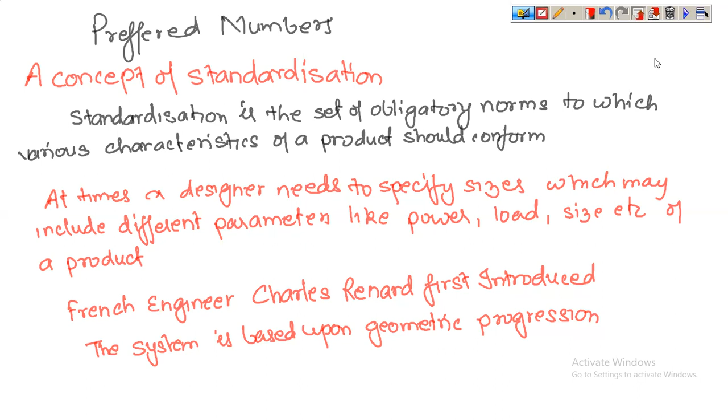So, if you look at the series of preferred numbers, the preferred numbers are of two types. One is basic and the other one is derived. A basic series means those series which are well designated, well in use, well in practice, and you only need to use them or specify them at the time of their usage.

So if we see R5 series, R5 series means it is the fifth root of 10. That is equal to 1.58. R10 is 10th root of 10, 1.26. R20 is 20th root of 10. So this is 1.12. R40 is 40th root of 10, 1.06. And R80 is 80th root of 10.

That is 1.03. Now, any series of preferred numbers is designated by a multiplying factor, that is this phi. This phi is used to clarify or specify the preferred number or the basic series that is being used or practiced. So with the help of one example, we will be seeing how this basic series and how these derived series are actually used in practice.

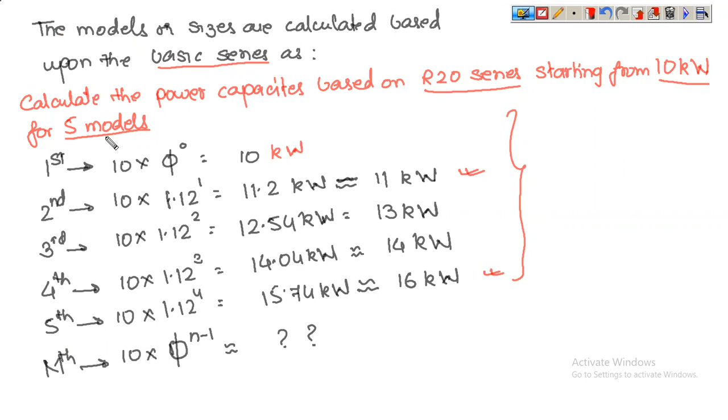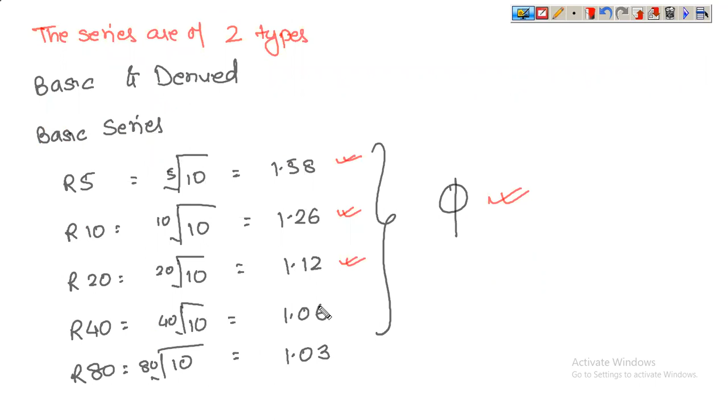Or you can say that this is your derived series. Now these derived series are not part of the standard series which have been mentioned here. These are standard series, and when you are not using the standard series, you can use this derived power series to specify your problem.

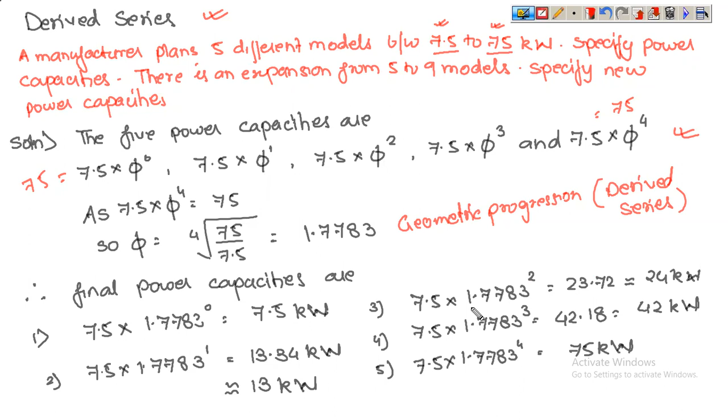So φ, if you calculate it, this fourth root comes out to be 1.7783. So the final power capacities shall be 7.5 into this geometric progression factor or derived series factor to the power 0. So this is 7.5 kilowatt. 7.5 into φ to the power 1. This is 13.34, which is equal to 13 kilowatt. For the next one, you have to multiply 13.34 by this 1.7783, not 13.

Okay, so the previous value, or you can straight away put it in this way, 7.5 into φ squared is equal to 23.72. This gets equated to 24 kilowatt. Similarly, the fourth model is 7.5 into φ to the power 3. This is 42 kilowatt, and 7.5 into φ to the power 4 is 75 kilowatt. So these are the 5 model capacities based upon the derived series, and the value of the series has been calculated in this. So in the problems of derived series, the first and the last model sizes will be known to you, and you will also know how many models have been planned.

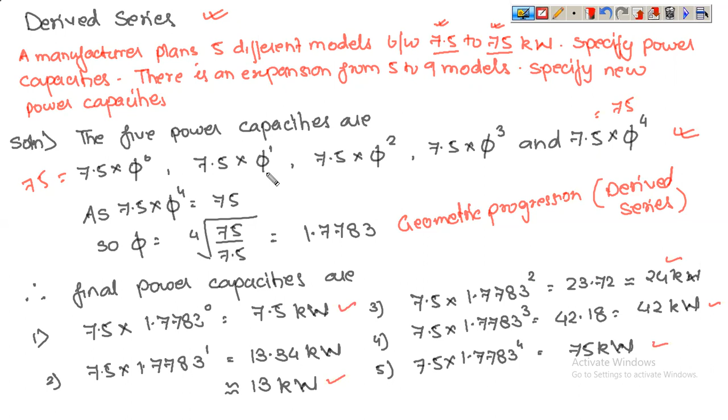Now coming to the second part of the problem, it says that there is an expansion from 5 to 9 models. So what was 5 here now becomes 9. That means 9 models have to be incorporated starting from 7.5 to 75 kilowatt. So look at those 9 models. This is altogether a new problem. So φ becomes equal to the 8th root of 75 by 7.5. Because for 5 model capacity, this was the 4th root, so for 9 model capacity, this is the 8th root.

So this is 1.3335. So the new power capacities will now be 7.5 into φ to the power 0, φ to the power 1, φ to the power 2. Similarly, if you go on calculating, you will have these 1, 2, 3, 4, 5, 6, 7, 8, 9 models, wherein the first model will be of capacity 7.5 kilowatt and the last model is of 75 kilowatt. And this is how derived series are used in practice.

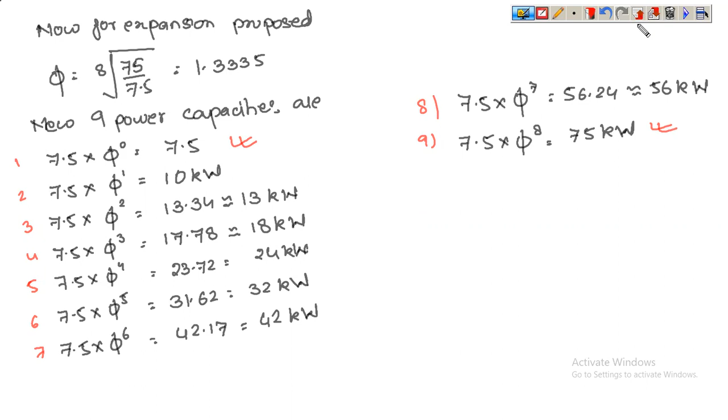Now there are 2 considerations in design. There is one aesthetic consideration and the other one is called the ergonomic consideration. So aesthetic consideration means the beautification of the product, how aesthetically you are representing the product. If you take the case of a car, aesthetic considerations means how the tail lines have been designed, how the streamlined structure of the car has been maintained, how the doors are looking, what are the interiors, what are the colors of the interiors. They add to the aesthetic value of the product, and they do not have any great technicalities associated with them. They are mostly related to beautification of the products, how much they are pleasing to your eyes.

Now next comes ergonomic considerations. Ergonomic considerations are man-machine relationships: how the components or equipment have been placed in the system, how a man is able to use it. As we know, in India, people mostly work with the right hand. So the right hand has control of, for example, the side indicators, whereas the left hand is restricted to using wiper options. The answer is very simple: the side indicator will be used more frequently as compared to the wiper.

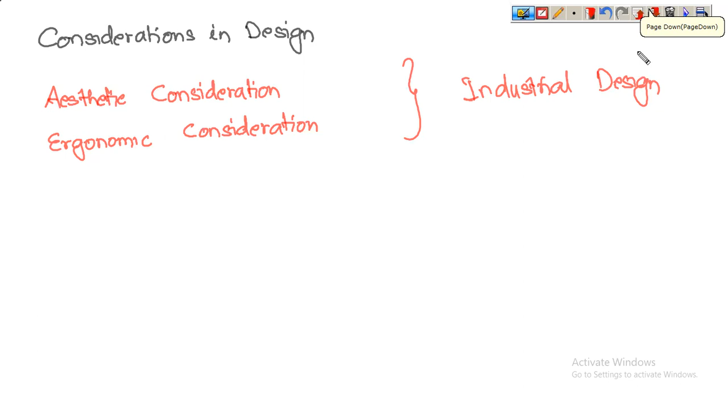Now, talking about concurrent engineering: previously, the manner in which the design process would continue was that the designer would specify the dimensions of the product. He would send it to the production department. The production department would prepare a prototype, then test it, and subsequently manufacture the complete product and send it to the sales and marketing department.

The sales and marketing department, after launching it in the market, would come out with feedback on what the possibilities are or where the product is getting a negative response, and once again the design process had to be conducted. Now, concurrent engineering is a method of designing where people from different departments sit together across a table and design the product. This helps us in having input from various quarters, and these inputs can be effectively utilized during the design phase itself, leaving very little scope for rework.

So concurrent engineering is basically a new concept in design, wherein people from different profiles of different departments, like for example, the sales and marketing personnel, are supposed to evaluate what the customer wants. So depending upon the customer requirement, he also gives his feedback during the design. When the material is being selected, the manufacturing and testing department can also give their opinions about the manufacturability or machinability of the selected material. So the material can be altered at this stage. Depending upon customer requirement, the basic design features can also be altered.

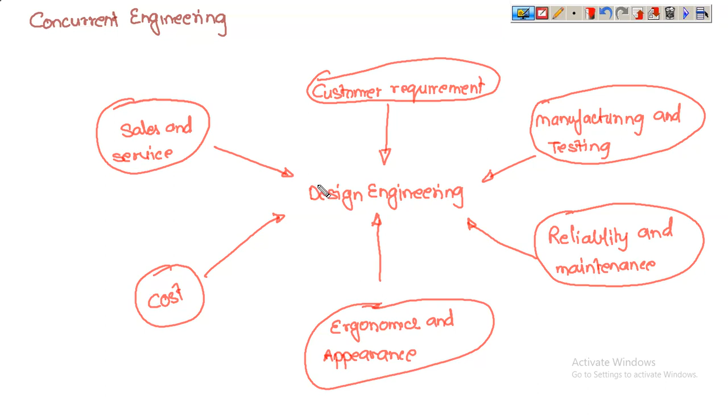And similarly, sales and service gives an account of the after-sales possibilities, the after-sales service opportunities that the product is liable to. Let us take a very small example. If you are manufacturing a vehicle, a clutch does not form a part of the warranty of a car. The reason is very simple, because the clutch is independent of product characteristics. It depends upon how the customer is using the clutch.

There are certain products which are a part of your 3 year or 5 year warranty system, but the clutch is never sold as a part of your warranty system, because it is purely dependent upon how the customer is using the product, and the clutch is composed of standard parts, and those standard parts will give you standard operating characteristics or standard reliability under a given set of operating conditions. So this is all about preferred numbers and their applications, and how these considerations in design and standardization contribute to the design process.